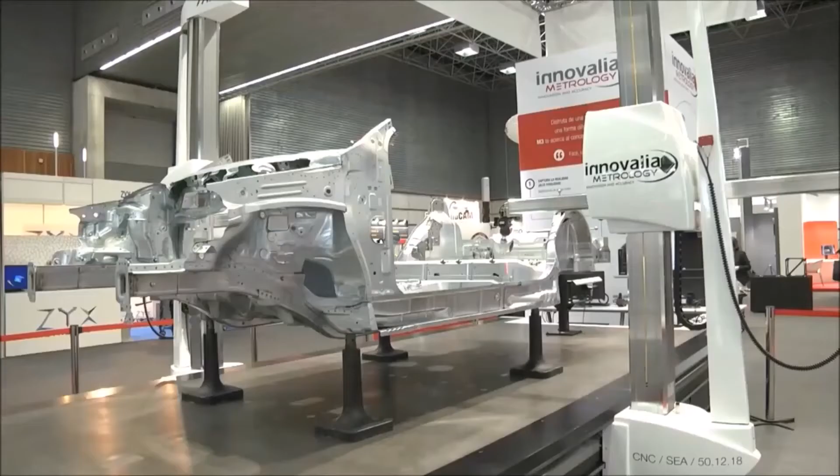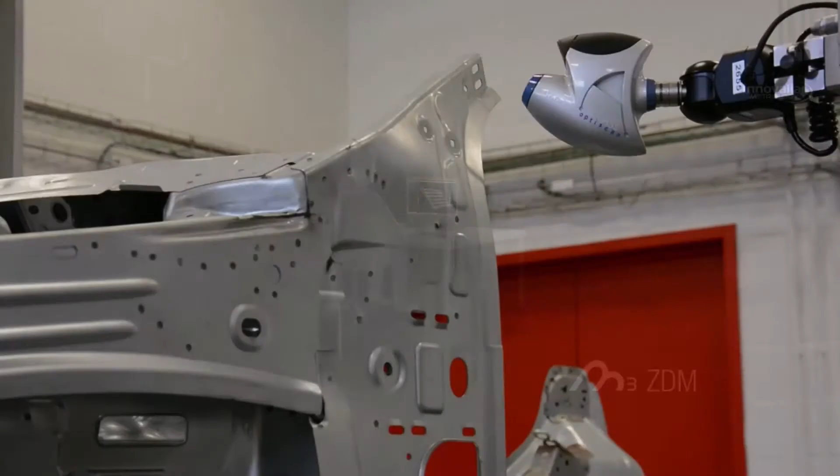Innovalia Metrology is an alliance of high-tech SMEs, aiming to provide a holistic solution for dimensional quality control, with an international presence in strategic sectors like automotive, aeronautic, renewable energy or railways. M3 Zero Defect Manufacturing connects metrology with the digital thread of your products, bringing total quality control through their life cycle.

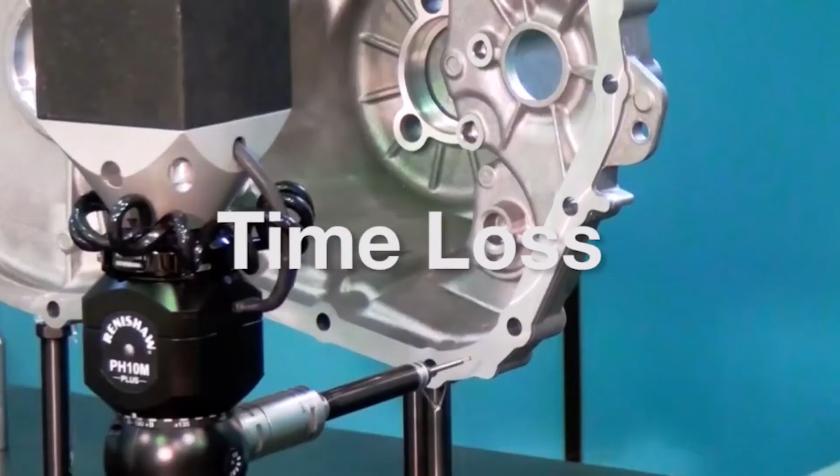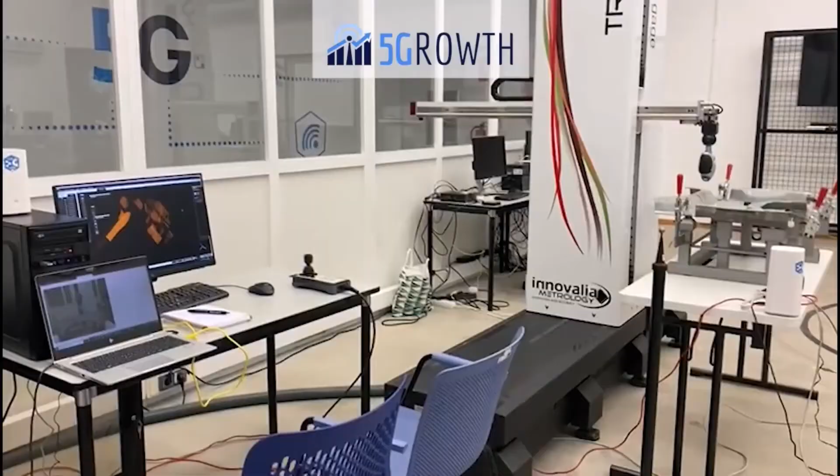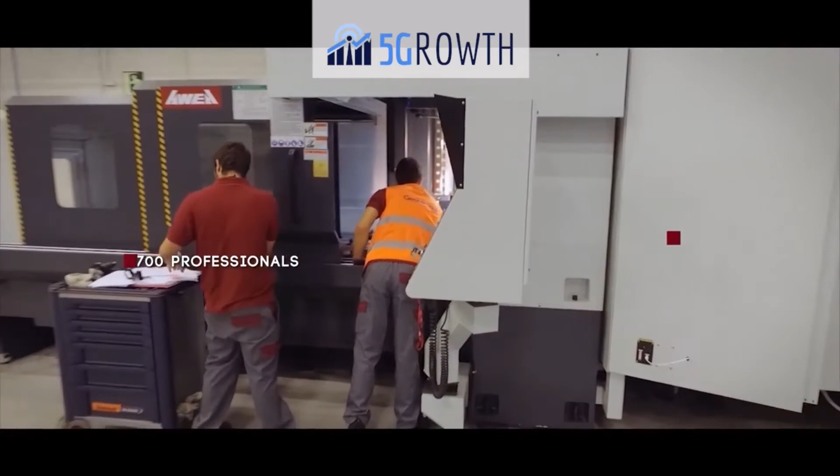But experts still need to visit factories physically to configure machines and design processes, meaning slower, less flexible manufacturing. And while COVID-19 has just proven how much this is a bottleneck, it has shown the full potential of remote working. In this context, and within the 5 Growth European project, Innovalia is teaming up with technology giants such as Telefonica, Ericsson, and more, to create the 5G-based, people-centric, metrological services of the future. This innovation is developed in first-class facilities like the Automotive Intelligence Center, in Bilbao, and the 5Tonic Labs, in Madrid.

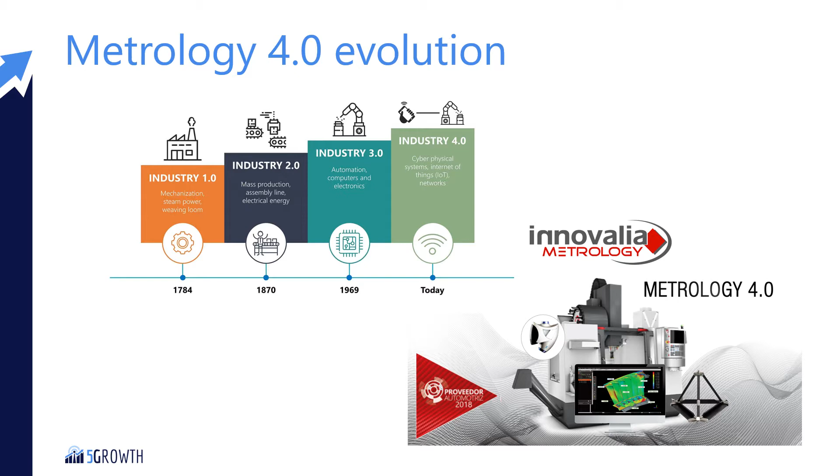Industry and Metrology 4.0 are evolving into fast, accurate, reliable, flexible, and holistic processes. Digitization and 5G cannot be seen as mere enhancements, but rather as essential tools for the transformation of the quality control paradigm. Thus, 5 Growth architecture and technology are vital enablers for more autonomous human-machine information interactions.

The purpose of this use case is, first, to validate the capability of 5G technology to enable remote operation of industrial machinery, by providing a secure communication, delivering high data rate and keeping a low end-to-end latency between devices. And second, to reveal the maximum distance between devices that keeps granting a smooth remote operation. This is the description of the use case.

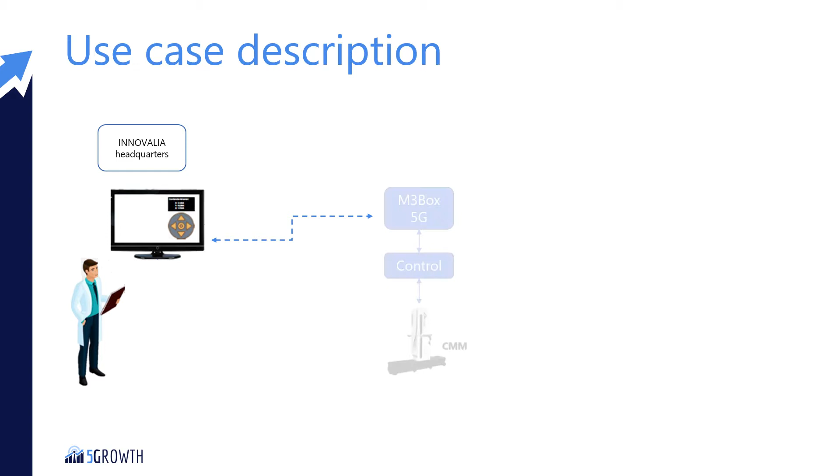A metrology expert, located at Innovalia headquarters, interacts with the M3 metrological software, in order to control a coordinate measuring machine, or CMM, installed at the manufacturing site, and equipped with an optical scanner. Besides, a camera is installed in order to stream, in real time, the movement and positioning of the CMM relative to the part to be measured, allowing the expert to have all the information required for the proper operation of the quality control device. All the communications between the expert and the CMM, including commands, metrological results and video stream, are done through 5G connection in the 5 Growth platform.

5G provides a reliable high-throughput performance, with a consistently low latency, improving previous mobile generations. This is vital for this use case, since it leaves higher margin to operate the machines from far distances. And this, coupled with the increased flexibility, automation and simplicity associated with the innovations developed under the 5 Growth project in terms of orchestration and slice instantiation, are key enablers to unlock novel capabilities and business models, even for SMEs, that were until now blocked by technical constraints.

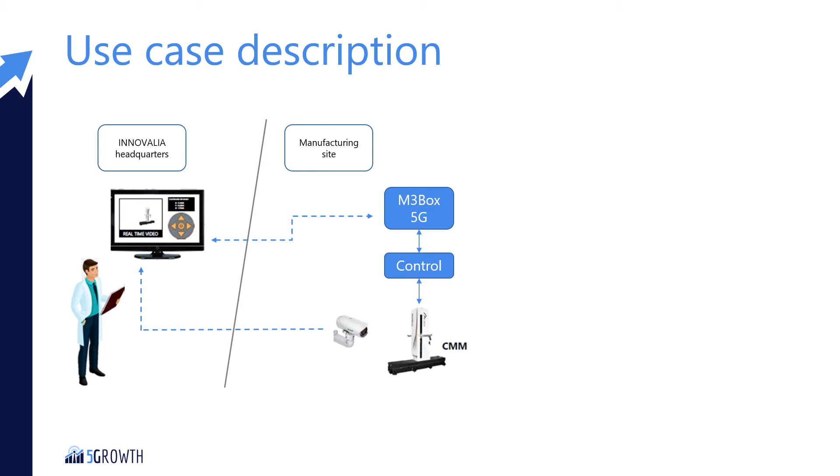Specifically, Innovalia Pilot aims at obtaining 5G connected quality control services for Workers 4.0, connecting anywhere, anytime, the M3 metrology software with the coordinate measurement machine and video system. This enables personalized, remote decision and quality control assistance. The idea is to be able to control the configuration of the quality process without the need to travel on site, even with sites located at medium to far distances, for example, trips along Spain.

Additionally, the vertical application is deployed on the network edge of the 5G architecture, and only when needed. This saves costs for the vertical, as they do not need to maintain the hardware and the application at all their customers' premises. The deployment would be extremely beneficial not only in terms of reduced expenses in travels, but also in terms of reduction of the response time, increase in the productivity of the metrological expert, and reduction of the carbon footprint related to business travel.

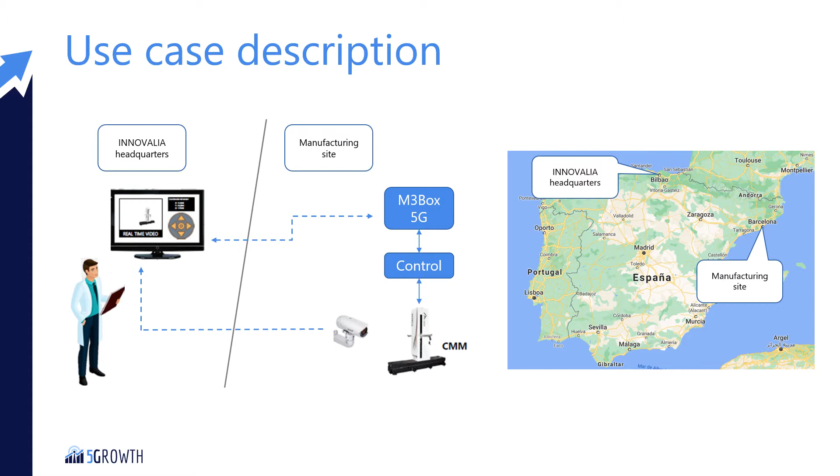Overall, industries will benefit from the ubiquity of 5G commercial networks connectivity, that will allow to instantly connect devices anywhere, in a faster, cheaper and more flexible way than cable. We have run this use case at 5Tonic with the following setup. On the one hand we have the M3 software and the display, and on the other hand the CMM, the vertical application and the camera. Those devices are connected to the 5G network installed at 5Tonic Lab via CPE routers. We have also configured the IP addressing, achieving connectivity between end devices.

Probes have been developed to measure the metrics. In this experiment we deployed one probe on the entry router to the 5G evolved packet core, and a second one on the Raspberry Pi camera. Available radio resources are important for the achievable performance. We are using the 3.5 GHz band. The available bandwidth is 50 MHz. The TDD pattern is 7:3. We are using 256 QAM modulation and a 4x4 MIMO.

Under these conditions we have measured in the RAN a peak data rate of up to 544 megabits per second in the radio downlink, and a peak data rate of up to 54 megabits per second in the radio uplink. As device-to-device traffic in this use case includes a radio uplink segment, that is the top data rate that can be achieved. When measuring latency in this use case, the following considerations must be taken into account.

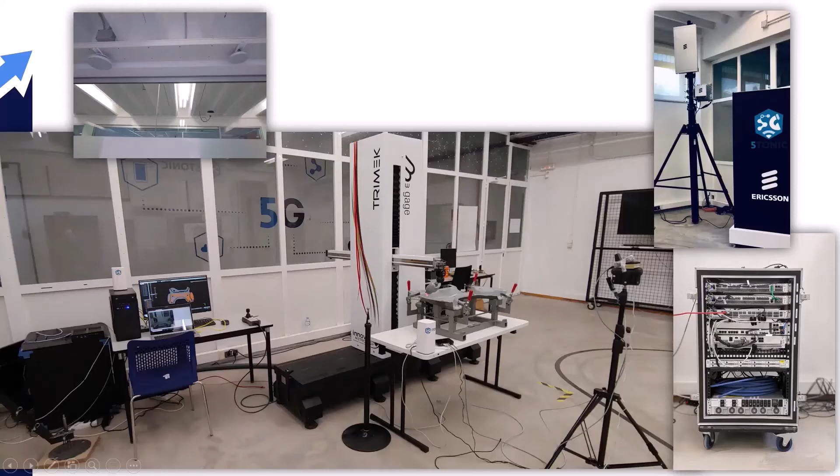This is the actual look of the setup at 5Tonic Lab. On the big central picture, we can see the user and devices involved in the use case. The devices on the left of the image belong to the remote control area and are connected to CPE1. The scanning area is on the right of the image. On the top pictures we can see the 5G antennas that provide coverage at 5Tonic Lab. On the bottom right picture, we can see the rack that is holding the 5G RAN and 5G Evolved Packet core equipment.

In order to deploy the service, 5Growth and 5G EVE platforms are integrated. The VNF packages, blueprints and descriptors are onboarded on the platforms. And the instantiation and termination operations are triggered in the 5Growth vertical slicer. Next, we are going to see how to instantiate Innovalia service.

Log into the vertical slicer. The Innovalia blueprints and descriptors are onboarded and ready to be used. Go into the vertical service instances section. Fill in the details. Select the available descriptors. Specify the blueprints and submit. This action triggers the instantiation, and eventually the network service request reaches the service orchestrator. After all deployment and configuration activities are completed, the vertical service will be instantiated.

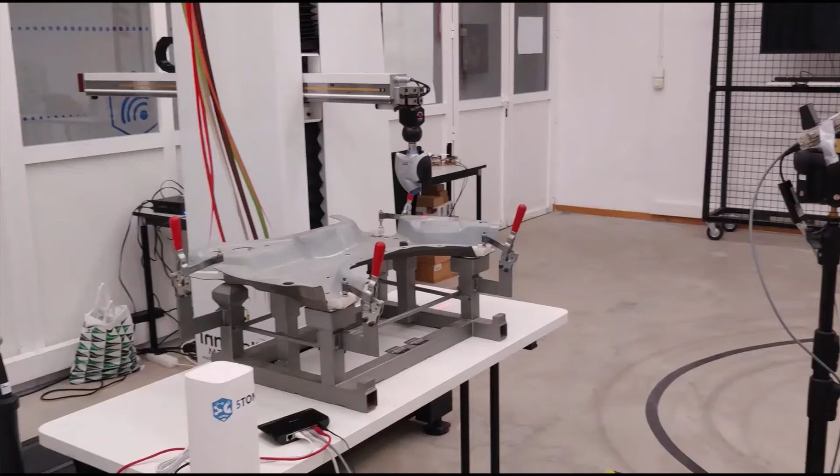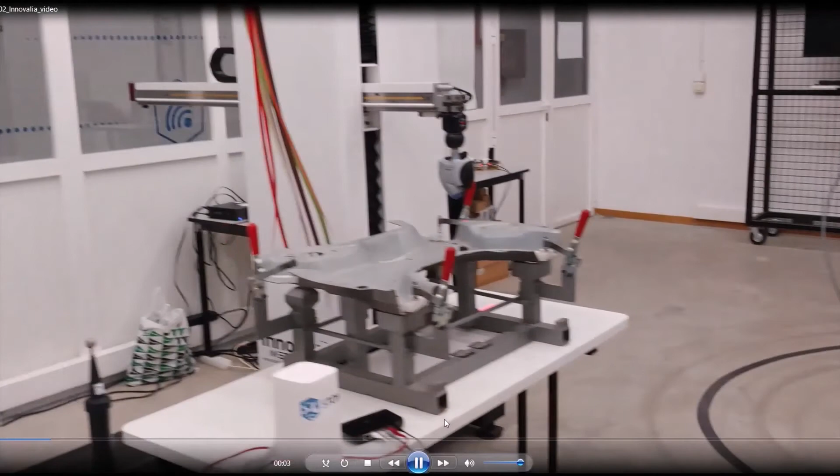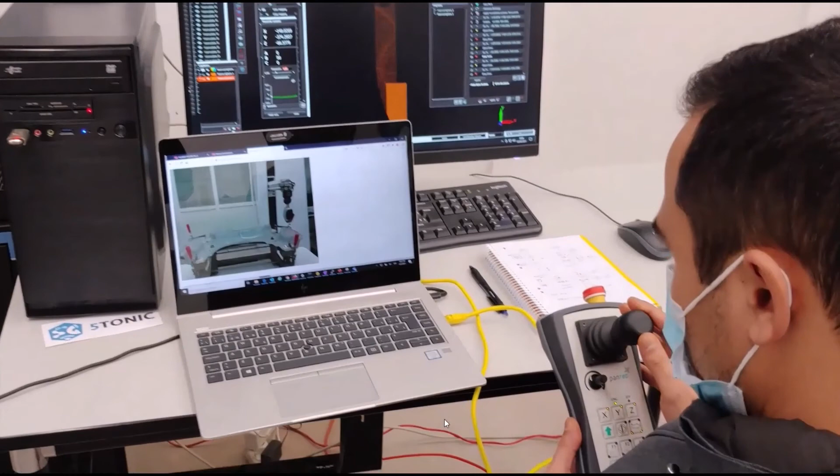This is a video recorded while experimenting with the use case. On the scanning area, the machine is operating. The process is being captured by the camera on the right. We have placed a panel in the middle, to block the line of sight. From the control area, the technician is controlling the CMM. He can move the machine, and while the machine moves, the piece gets scanned and the metrology results are sent to the M3 software.

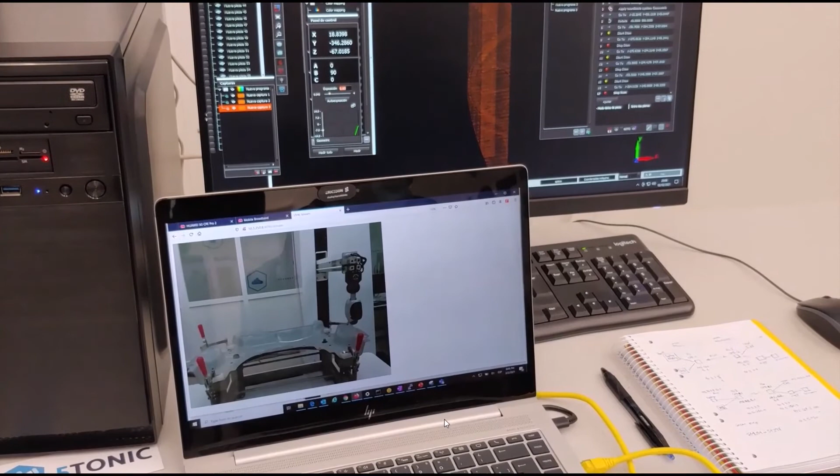We can see that the video quality is good enough for the technician to control the machine, and that the M3 projects the results aligned with the movement of the coordinate measuring machine. While running the use case, these are the metrics that have been observed. On the upper part of the slide, we find the metrics of the video streaming traffic, measured by the probe on the Raspberry Pi camera.

Note that the latency measured is the round-trip time since the packets leave the Raspberry Pi towards the display on the other end until the ACK is received back. This value is around 45 milliseconds. The data rate demand is constant and is 20 megabits per second. The lower part of the slide is showing the metrics for traffic between the CMM and the M3 software. These flows are measured by the probe on the router.

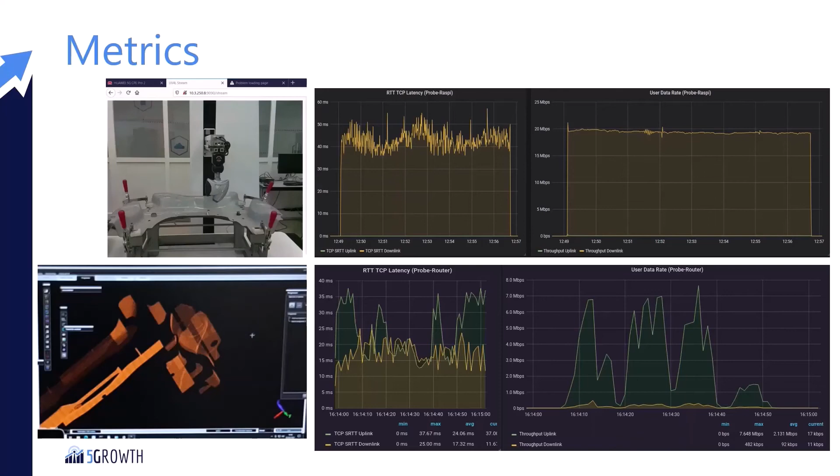The yellow line shows that communications sent towards the CMM have a round-trip time of 15 milliseconds between the core and the CMM, and a data rate demand of under 1 megabit per second. The green line shows that the optical scan results sent towards the M3 software have a round-trip time of around 35 milliseconds between the core and the M3 software when there is traffic, and a data rate demand of up to 7 megabits per second.

To study the effect of the distance between locations, we have correlated the KPIs and the distance. We have added a VM in the path, where we use the network emulator tool to shape the traffic delay. We have obtained the KPIs for different distances. At 0 kilometers, the experience was scored as good by the Innovalia expert, and we measured, as we said earlier, an RTT latency of 45 milliseconds.

Later, for a distance of 2,000 kilometers and 3,000 kilometers, the experience was scored as acceptable. Finally, for a distance of 4,000 kilometers, the experience was perceived as bad. Thus, the maximum radius of operation would be around 3,000 kilometers.